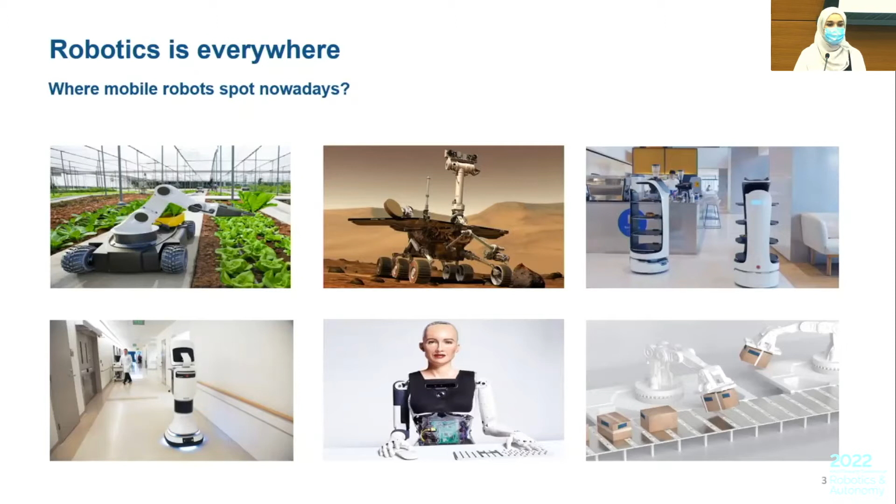From the great world of robotics, solutions are emerging to mitigate the impact of the pandemic, which has affected several sectors. This has greatly increased the awareness about the necessity for automation and robotics in sectors such as industry, healthcare, agriculture, and so on. Many decision makers have encouraged the development of these fields by providing funding for automation and robotics.

The work I'm presenting is part of a project entitled 'Autonomous Robotic System for the Transfer of Fruit Crates in the Agricultural Field.' This project focuses on the design and fabrication of a wheeled mobile robot prototype carrying a dual arm manipulator, and includes a solar panel for storage of photovoltaic energy in a reliable battery, making the whole system autonomous. It involves several research axes such as manipulator arms, energy autonomy, and mobile robots.

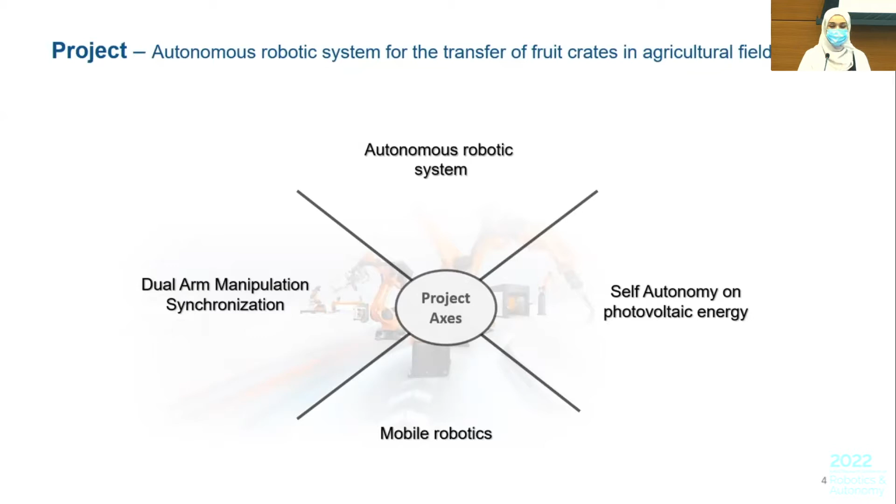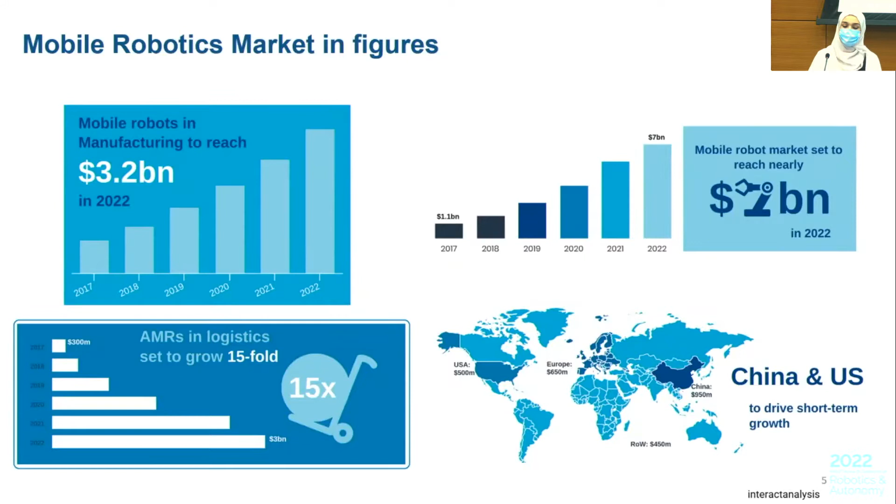Mobile robotics is a fast-growing research field and market. Here I present an infographic about the mobile robot market in 2022, based on a recent report from the Interact Analysis platform. This report shows the rapid pace of development in this field—worth just $1 billion in 2017 and forecast to hit $7 billion in 2022.

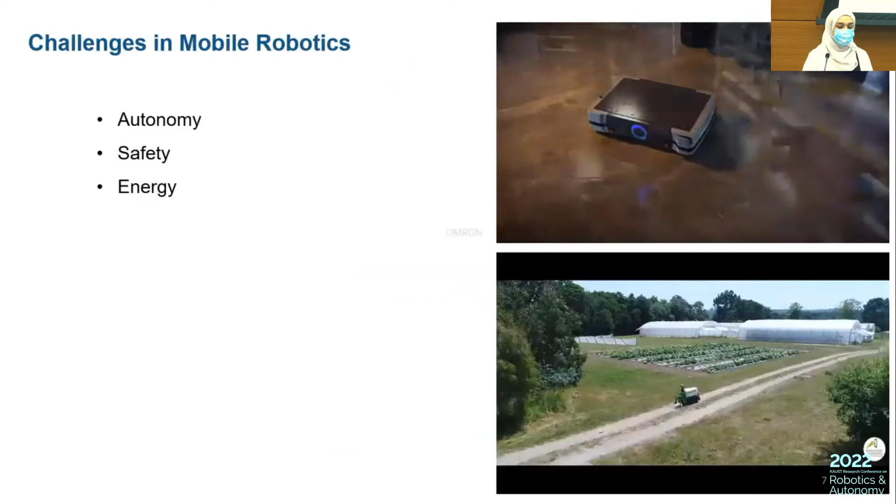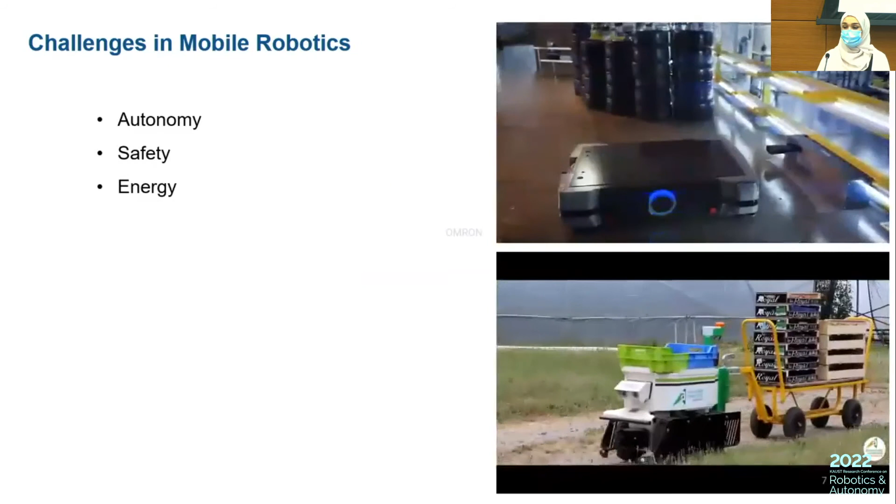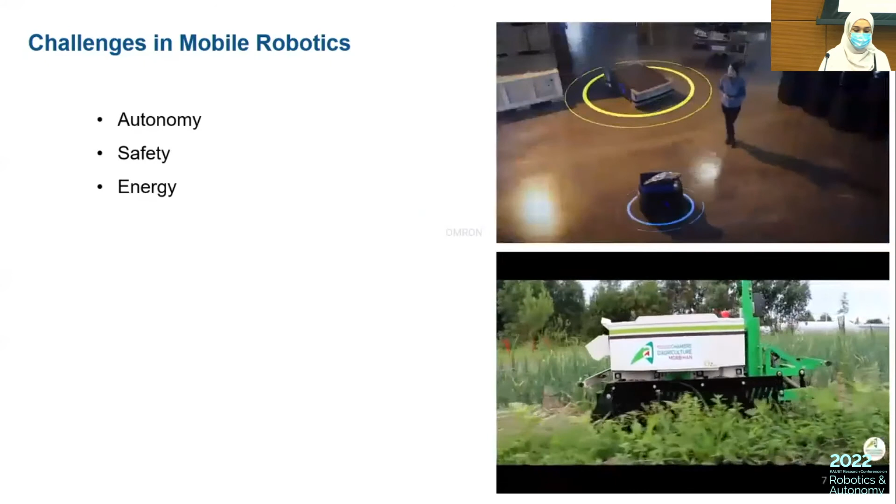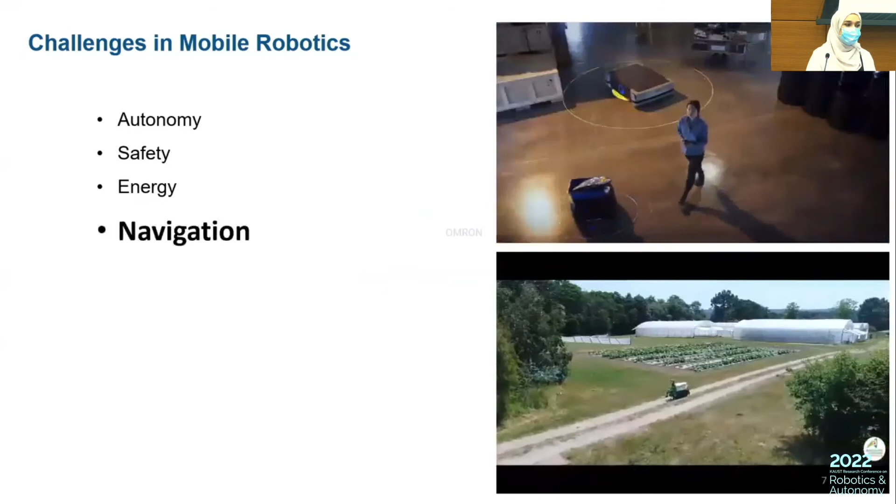As a fast-growing research axis, mobile robots face challenges such as autonomy and safety. Autonomy refers to the ability of the robot to act autonomously and make its own decisions. Safety refers to the ability of the robot not to harm itself or persons, and to act dynamically even alongside humans. Navigation is also an important challenge, referring to the robot's ability to maneuver independently in its environment from a start to an end location.

Navigation is based on three main parts: localization, mapping, and planning. Localization refers to the robot's ability to determine its precise position in its workspace, depending on data collected from its sensors. Mapping means the ability to create a map of its environment. Planning refers to the ability of the robot to search for a collision-free path from a start to a target location.

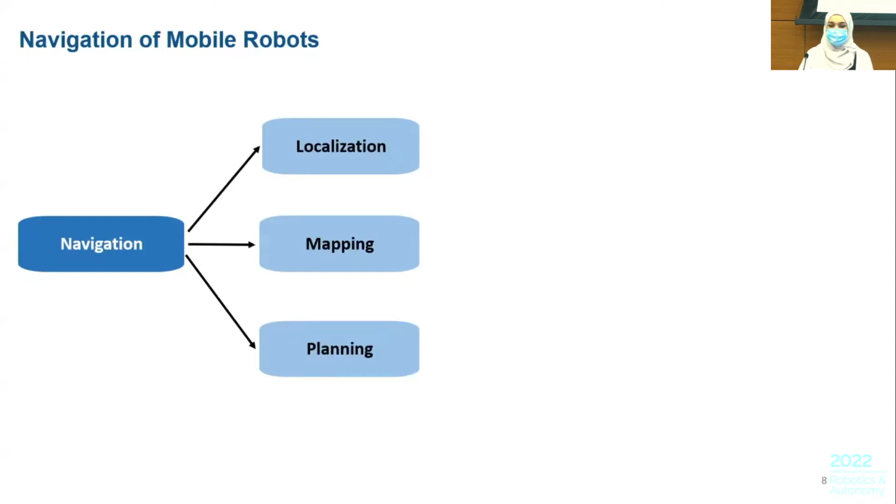Planning can be classified as a multi-objective optimization problem, based on collision avoidance, least distance, travel time, and reaching the destination. All these factors depend on the environmental complexity.

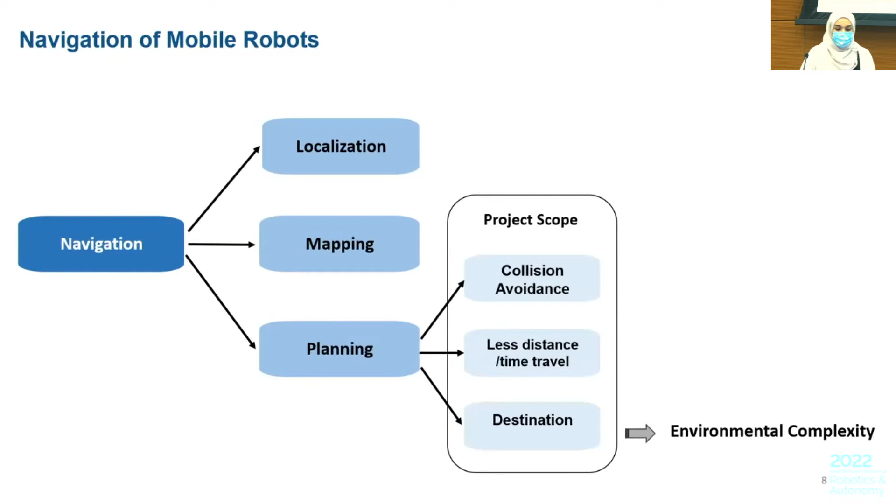Several approaches in the literature have been used. Some approaches take into consideration the robot's dynamic and kinematic constraints, such as the curvature velocity method and the vector field histogram. Other approaches don't take these constraints into consideration, such as the artificial potential field.

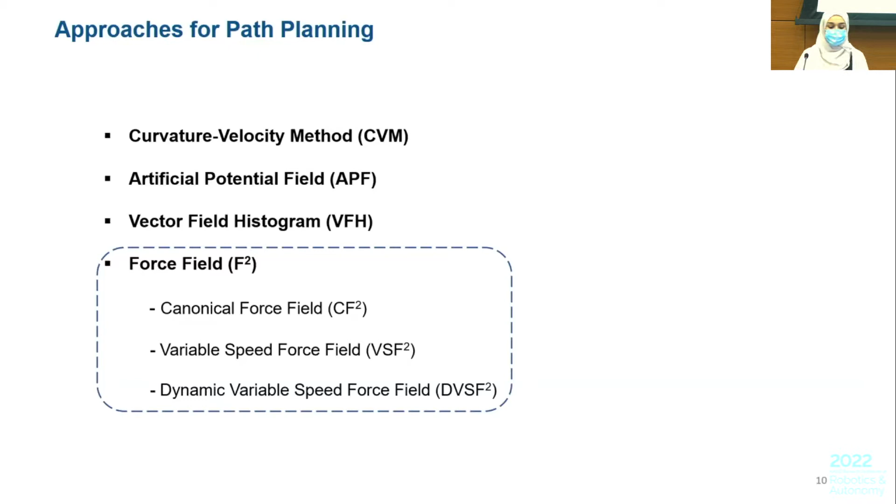The advantage of the force field method is that it's a real-time collision avoidance approach, suitable not only for single robot but also for multi-robot motion planning. There are designs derived from it, such as the canonical force field and the dynamic variable speed force field, DVSF2.

Here, as a real-time collision avoidance approach, F2 is defined as a virtual field of repulsive forces in the vicinity of a robot when it is moving in a working space. This approach contains two main forces: the repulsive and the attractive.

The repulsive force is a virtual one applied by the obstacle on the robot. When the obstacle is included in the force field area of the robot, it will influence the movement of the robot by applying a virtual repulsive force on it. The attractive force is a virtual force applied by the goal on the robot, to drive the robot toward its goal.

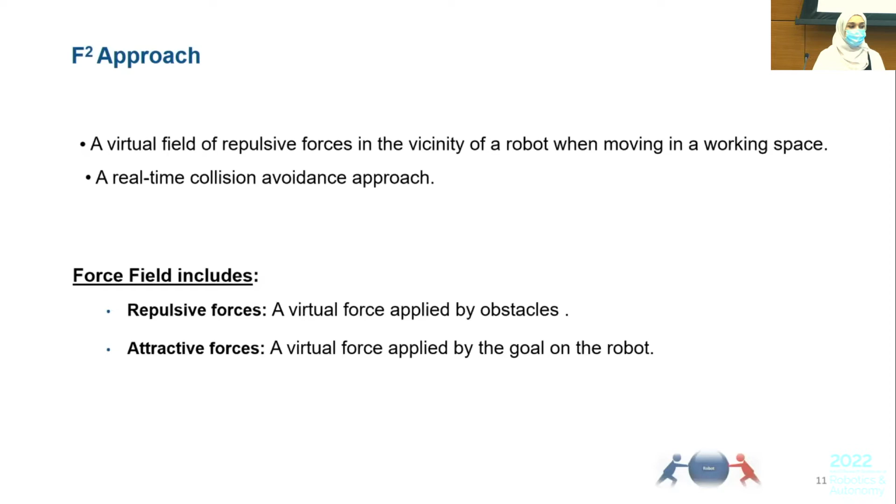Here I have a figure describing the main concept of the F2 approach. Here presented is the robot, its goal, and the existing obstacle, which is included in the force field area of this robot. The force field area is limited by the Dmax and Dmin circles.

The Dmax, the green circle here, presents the maximum action distance at which the obstacle will apply a minimum repulsive force on the robot. Dmin is the minimum distance at which the obstacle will apply the maximum repulsive force on the robot.

So if the obstacle approaches the robot and gets near the minimum distance, its repulsive force will be increasing, and at the level of the minimum distance it will apply its maximum repulsive force to repel the robot. The robot here will be at its maximum deceleration, to avoid collision as the obstacle is too close.

Point A here is the nearest point on the obstacle to the robot, at which the repulsive force will be applied and directed to the center of the robot.

The magnitude of the repulsive force here depends on the robot speed, the robot size, and also the distance between the obstacle and the robot.

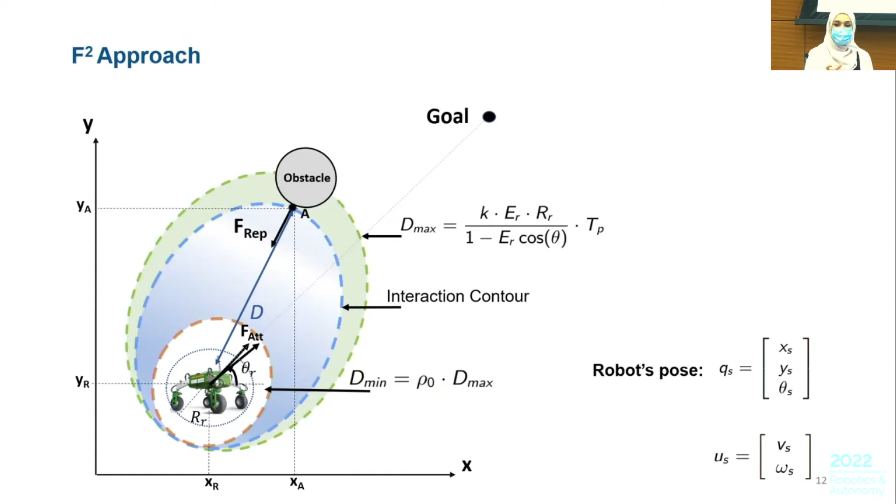I can illustrate with the example of a robot moving in an obstacle-cluttered environment. This robot will have a smaller force field, and its speed will be decreasing, to allow the robot to pass through narrow passages.

Here in this figure, the position of the obstacle is closer to the robot. I can note here that the force field area depends on the robot's physical characteristics, and also on its speed.

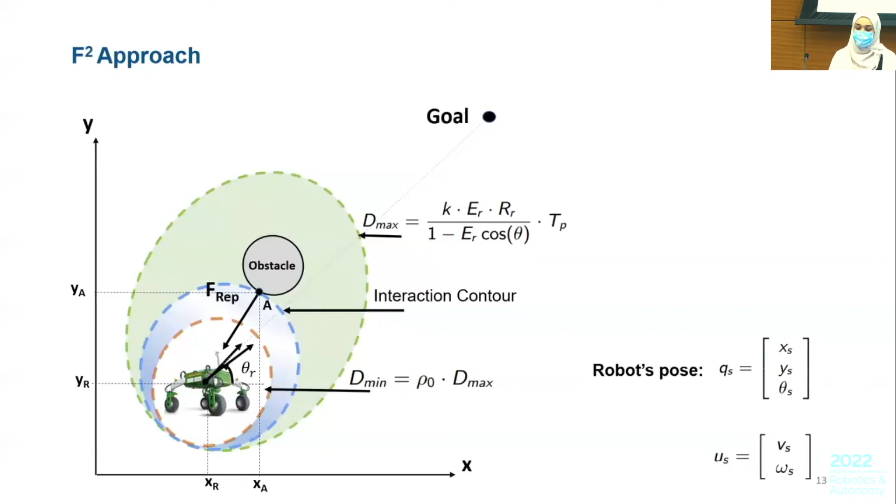So if the robot moves faster, the force field area will be larger, to provide sufficient space for the robot to decelerate and steer away from obstacles. And if the size is larger, the force field coverage area will also be larger.

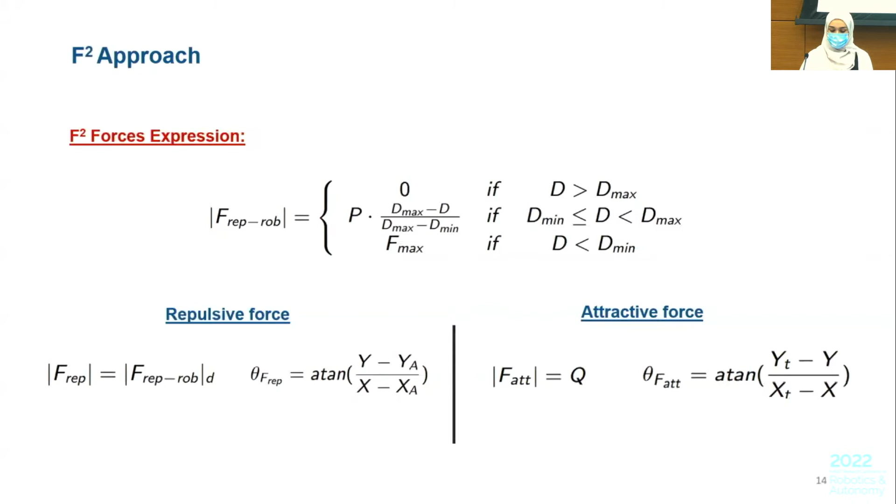Here the expressions of the force field forces are presented. We have the repulsive force applied by the obstacle on the robot, which depends on Dmax and Dmin, the limits of the force field coverage area. And here I have the repulsive and attractive force expressions.

Now I move to the design deriving from the force field approach, which is the dynamic variable speed force field approach. It is characterized by the fact that the evolution of linear and angular velocities depends on the sum of the attractive and repulsive forces.

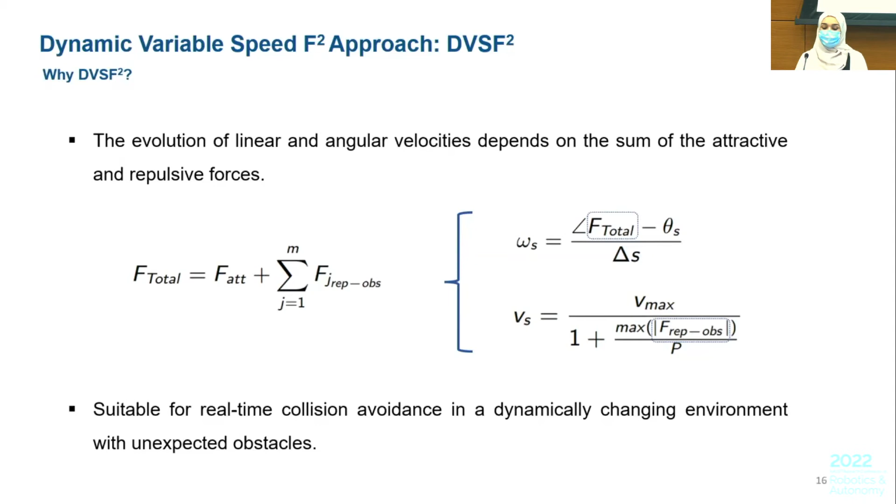Here we have the expression of the angular velocity and the linear velocity, which depend on F total and the maximum repulsive force. This will yield improved flexibility of the robot in its motion. This method has the advantage of being suitable for real-time collision avoidance in a dynamically changing environment with unexpected obstacles.

So here, to investigate the effect of parameter selection on the performance of the DVSF2 method, PSO, the particle swarm optimization algorithm, is used to search for the optimal parameter selection of our proposed approach.

As a brief introduction for PSO, it is inspired from the social behavior of birds flocking. So the displacement of birds from one place to another is equivalent to the evolution of the swarm of solutions. Here, each particle in the swarm is characterized by its position and its velocity.

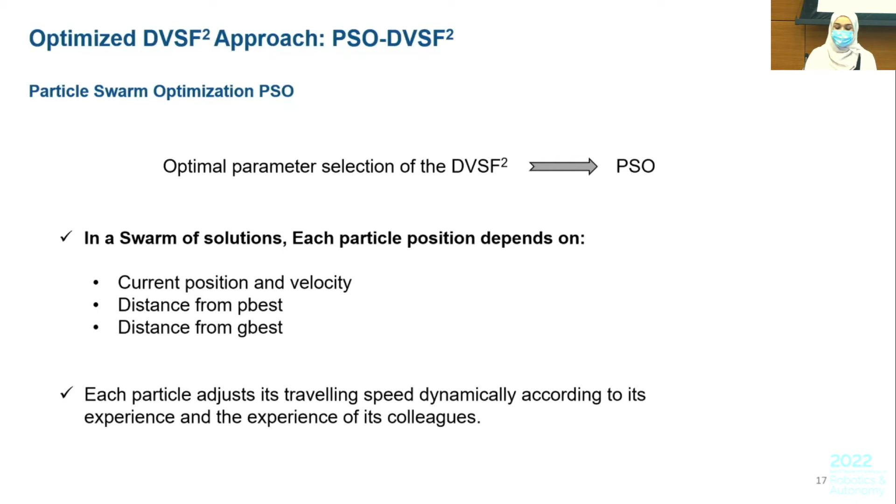Each particle's position depends on the current position and velocity, the distance from the personal best attempt of the particle, and the distance from the global best performance of the swarm. Regarding speed, each particle is adjusted according to its experience and to the social experience of the swarm. The goal here is to find variables that minimize the objective function while satisfying constraints.

Our fitness function here is a weighted sum of two criteria. The first criteria is to minimize the travel length between the position of the robot and its target. The second criteria is to maximize the distance between the robot and the nearest obstacle.

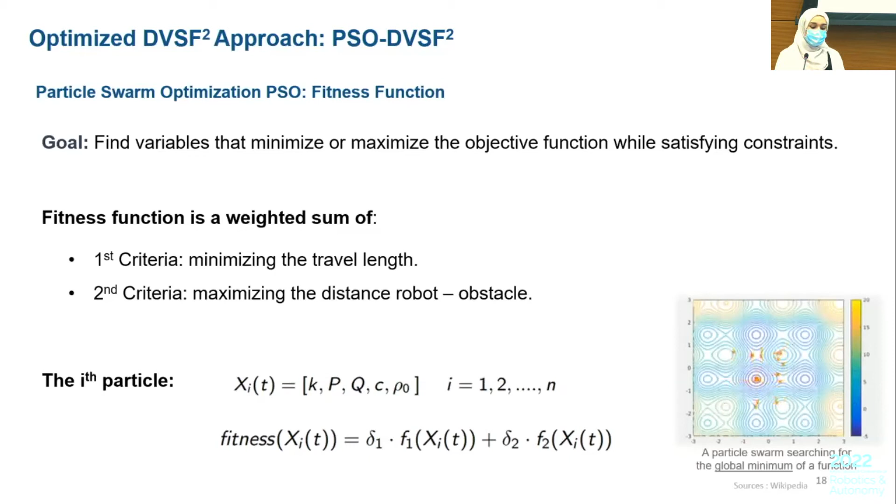Here I have the vector xi, which includes the optimized parameters: the parameter delimiting the coverage area of the robot, the parameters adjusting the magnitudes of the repulsive and attractive forces, the environmental parameter measuring the effect of the environment on the force field area, and the parameter which determines how close the robot can be to the obstacle.

Arriving now to the PSO-DVSF2 algorithm simulation results in static and dynamic environments. Here we have a static environment where the blue circles are static obstacles, and here are static obstacles also. Here we have the start and the goal of the robot.

The generated path is presented here, showing satisfying performance regarding collision avoidance and also regarding optimization of the path. Regarding the dynamic environment, we have similar performance, where the dynamic obstacle is presented in green.

The robot travels from the start to the goal, and as I said before, it satisfies collision avoidance with obstacles and optimization of the path. But the drawback here is the appearance of oscillations in the trajectory of the robot, mainly when it is avoiding obstacles, when it is near them.

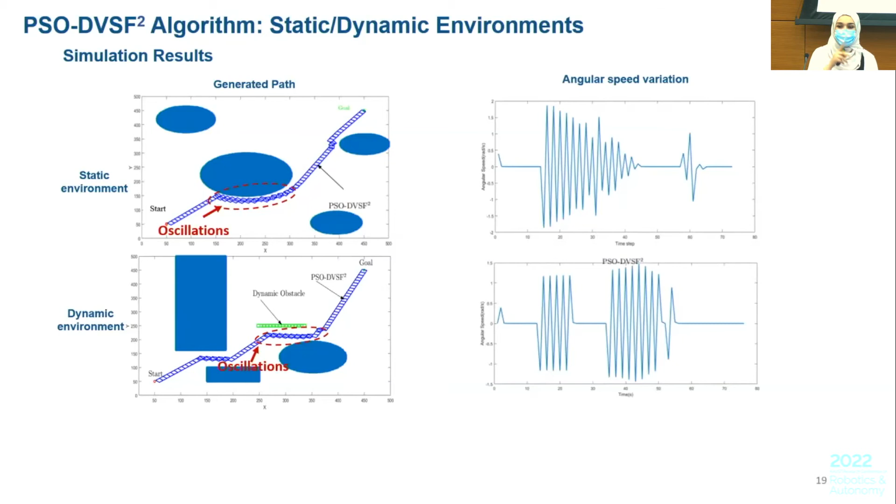So there are oscillations reflected here in the angular speed variation, with high and rapid oscillations disturbing the smoothness of the robot trajectory and yielding instability for the robot in some parts of its trajectory.

So we can assume that the PSO-DVSF2 algorithm gives good or satisfying performance regarding collision avoidance and optimization of the path, but its major drawback is the rapid and high oscillations appearing in the angular speed variations, which affect the global quality of its generated path.

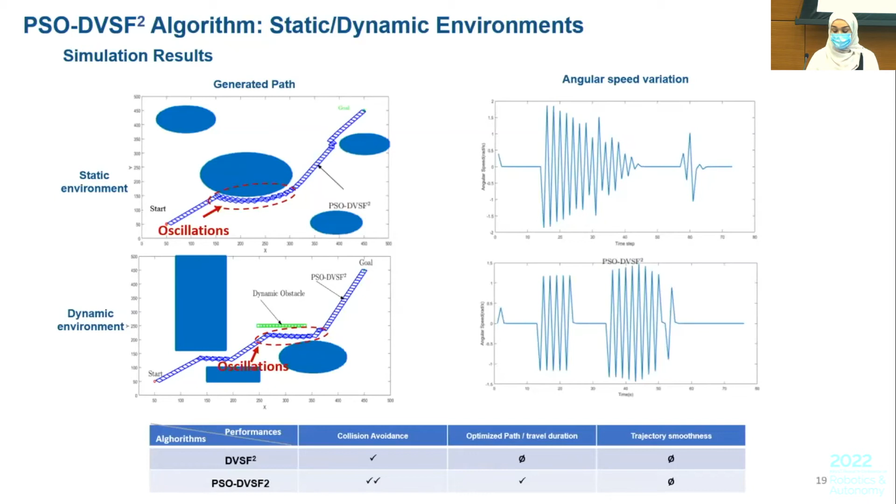So we are searching for a solution to overcome this drawback. In a first step, we present imposing an angular speed limitation on the DVSF2 approach, to try to limit the oscillations and avoid these disruptions, improving the stability of the robot.

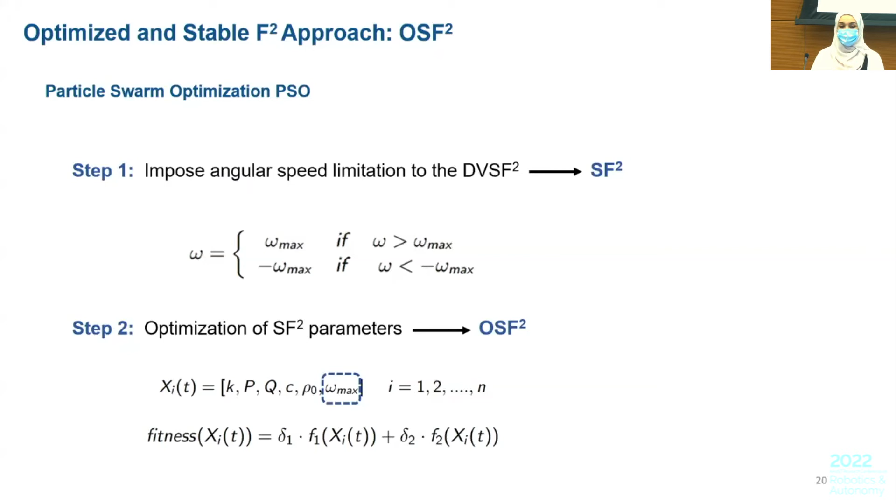Then in a second step, the optimization will play its role in searching for the best combination of optimized parameters for the SF2, yielding the optimized and stable F2 algorithm. Here we note that xi, the vector containing the optimized parameters, also includes omega max, the maximum value of the angular velocity, considered as an optimized parameter.

After these updates, the OSF2 algorithm simulation results are presented here, showing the generated path of the robot after application of the OSF2. Here we have two dynamic environments: the first containing only one dynamic obstacle, and the second more complex with two obstacles. Here we note the trajectory of the robot avoiding collisions.

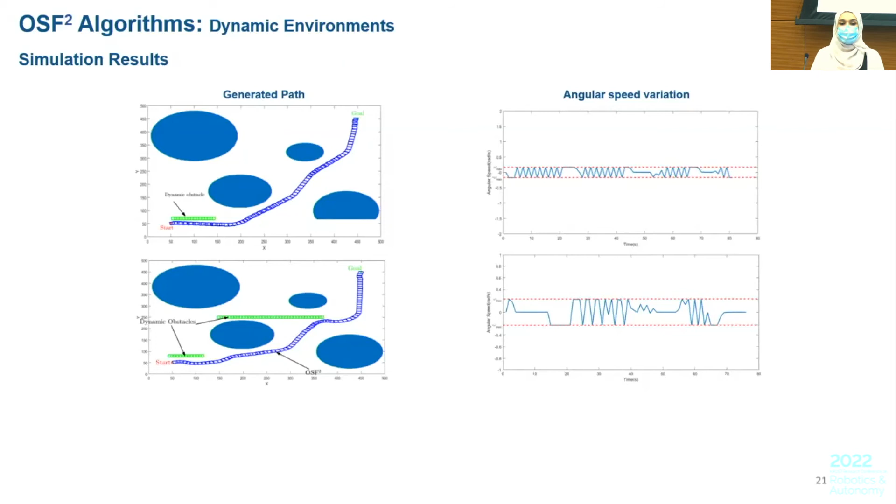The trajectory optimizes the path and also improves the stability of the robot, even in the presence of obstacles. The disappearance of rapid deviations in the behavior of the robot is noted here, and this is due to the updates and the application of angular speed limitations on the angular speed of the robot.

Okay, here I can resume.

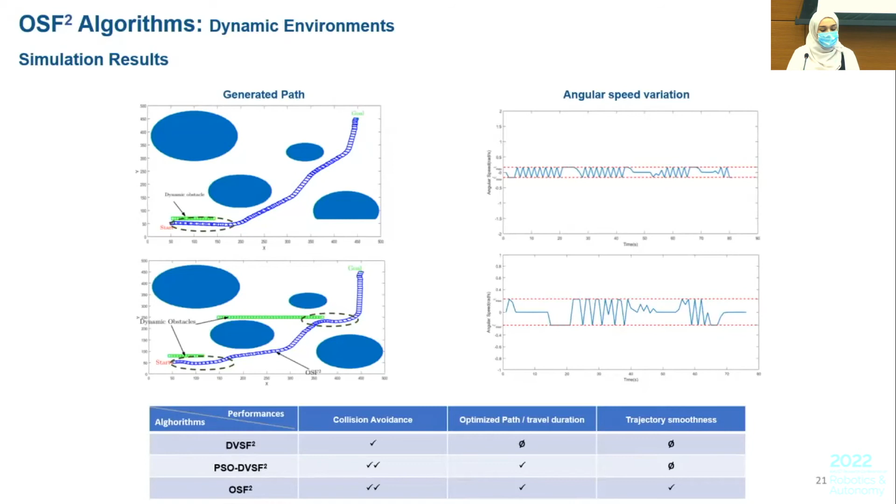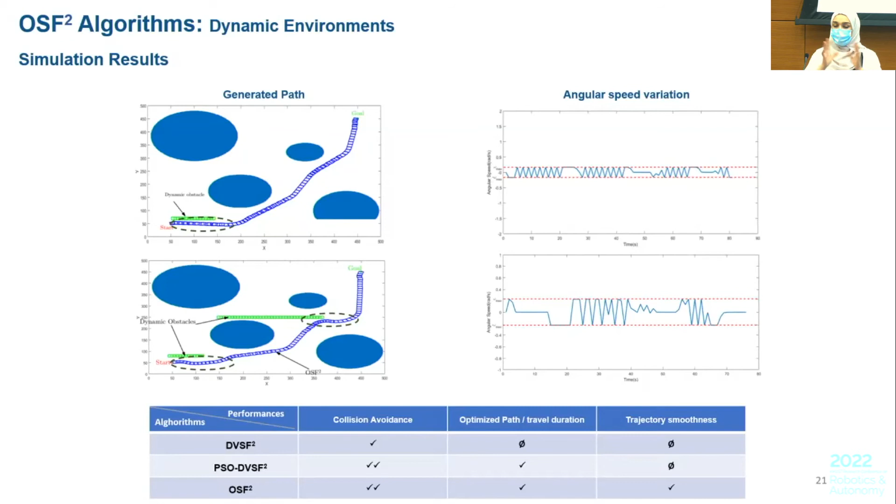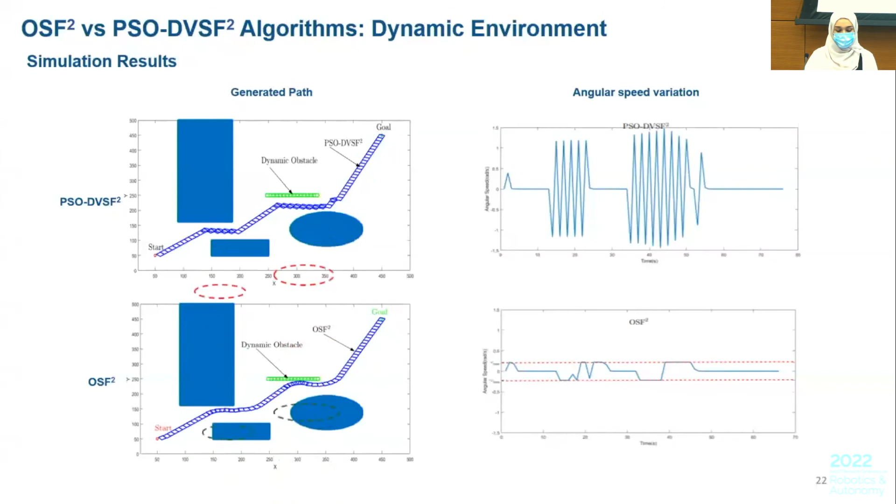I say that collision avoidance and optimization of the path are always guaranteed, in addition to the improvement on the smoothness of the trajectory and the quality of the travel of the robot. Here I have additional simulation results which also prove the same performance of OSF2 in comparison with PSO-DVSF2.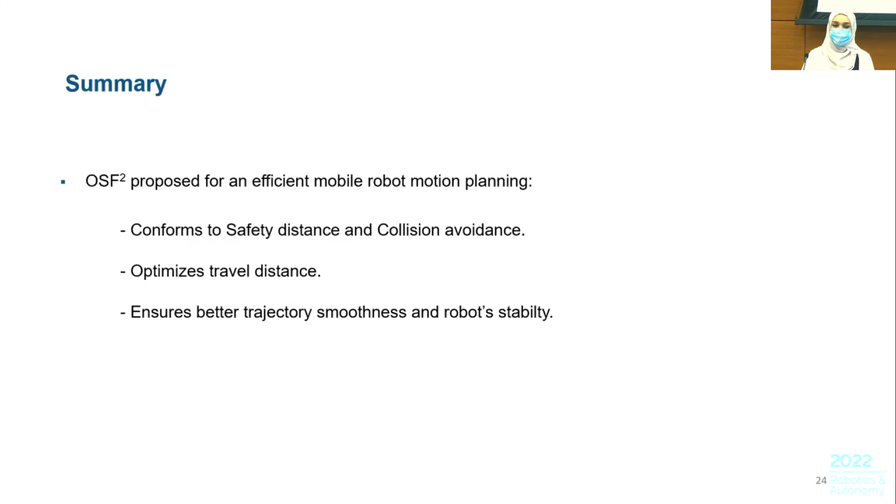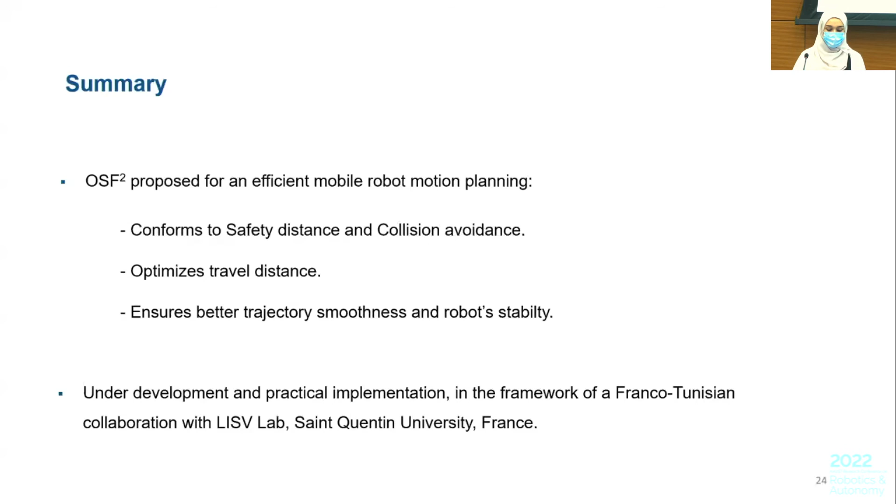I move now to the summary. As I focused on the performance and importance of motion planning in mobile robots, OSF² is presented here as an improved solution to ensure better trajectory smoothness, in addition to optimization of the travel distance and collision avoidance. This method is under development and practical implementation in the framework of Franco-Tunisian collaboration with the LISV laboratory from France.

Our next perspectives are important challenges we will focus on. The first is to continue development and practical implementation until practical testing of the approach, and then to work on real-time search for the optimal path in dynamic multi-robot environments, where the robot has to deal with uncertain position information and disturbances. That's it for me, Doc.

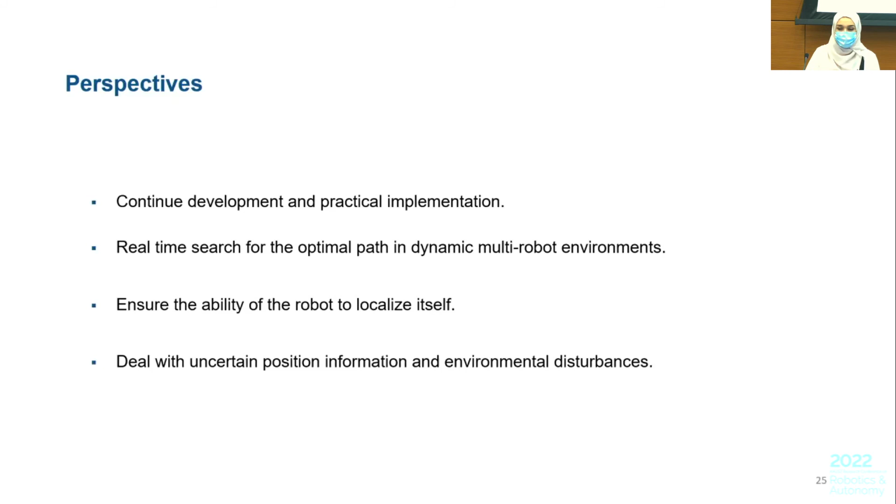What's the value of the mobile robots market in Saudi Arabia?

The statistics I presented weren't for Saudi Arabia only, it was for the world. What I know is that mobile robots are always in increased demand in almost all countries, as it is very important. And as I said, after the pandemic there is a very high demand, or necessity, for automation and for robotics, especially mobile robots.